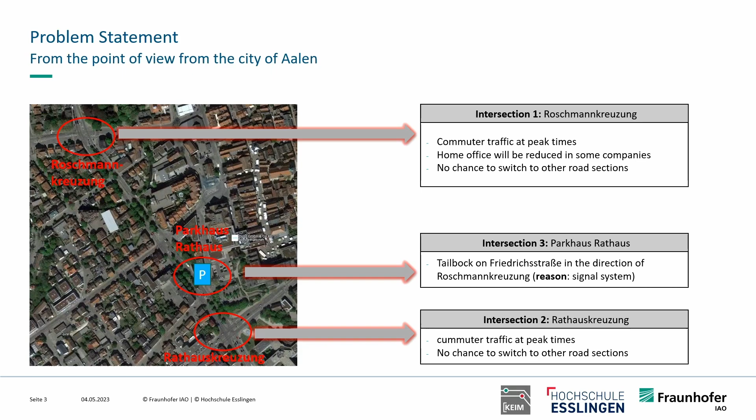This is a zoom to the intersection, the one in the north side, the Roschmannkreuzung. This is the Rathauskreuzung, and these two are connected by intersection 3. The problem is these are the major traffic axes, meaning there is a high amount of traffic there.

What's special about these intersections is that there's a bicycle lane, many pedestrians walking, and multiple lanes with trucks, cars, motorcycles, and buses. The goal here is to optimize the traffic flow by optimizing the traffic light system.

We thought about optimizing it maybe with other technologies, like a digital sign that says the traffic light is red, so turn down your speed or decrease the speed. But it wasn't that easy to do this, because there are many problems, so we decided to try to optimize the traffic light system instead.

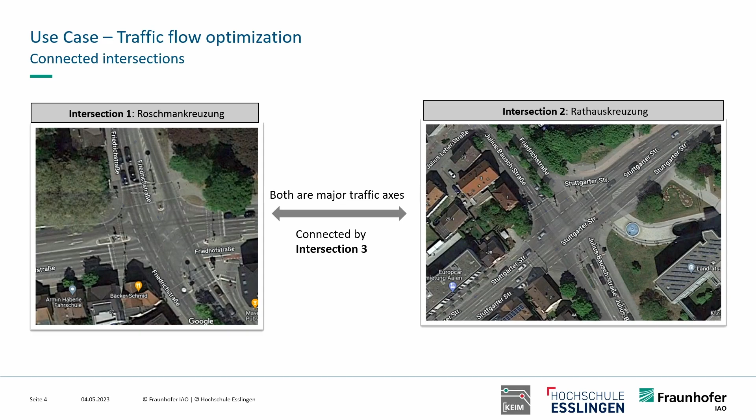Our solution approach, which we call a rule-based framework - we always need a fancy name - the idea behind this is that we want to collect a lot of data, not only traffic data from induction loops that detect a car in front of the traffic light, but also event data, like whether there's a football game, weather data, and so on. We are researchers and we always want more data.

Also parking data, meaning how many slots are free or empty in the parking houses. And part of the project is that we want to install more sensors to get more data.

These sensors are kind of special - about 10 camera systems. These cameras are connected to each other, meaning they can create an origin-destination matrix, and then we can hopefully see if a car turns left here, we can see this car on this lane turns left to this lane. That's the idea - if it works, we will see.

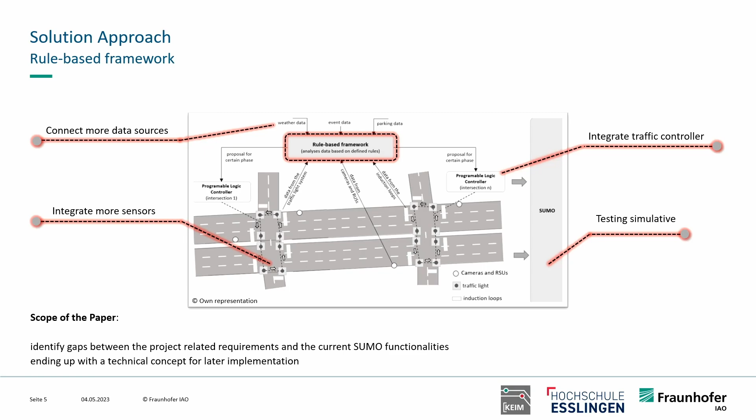So our idea is that we try to get the real world and model it in SUMO so that we have a one-to-one copy in SUMO. That's our goal. And for the paper, the scope is that we just want to see what are the requirements of the project which we need to transfer or which has to be covered by SUMO.

And first of all, to see, this is one crossing. It's a very simple picture of it. I made it with PowerPoint, it looks very fancy, I know. What you can see here is we have video detections and induction loops, and what I want to show you with this picture is that we have many sensors already on the crossing. It's not that easy to see all what is here.

I will read shortly: induction loop. We forgot to translate it to English, sorry. We have video detection, Trafi Cam, ZD - this one here is unknown. Then we also have sensors we don't know what this is. We received a paper from the city of Aalen with this information, so we're also not sure what this is, but there is something.

And the idea is that we want to integrate more data sources like the cameras - I told before, they are connected and exchange data via MQTT. And also we want to install roadside units there, for example for vehicle-to-X. And also consider data sources like Aalen events, weather data, and so on. So this means that these sensors will increase.

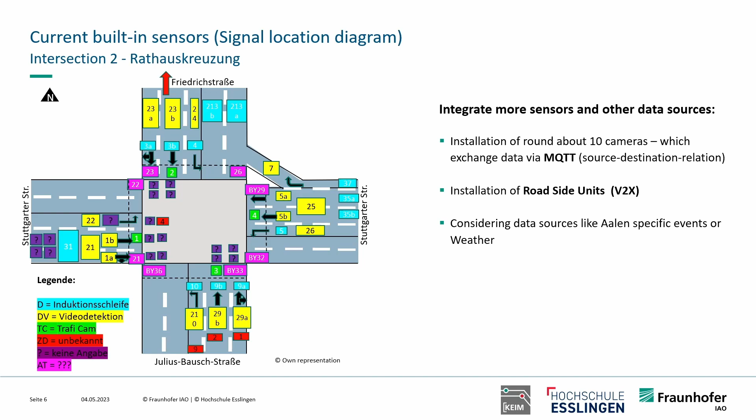Then I told you that we want to optimize the traffic light signals. This means that we have here a phase sequence plan. We have the different phases here, and here we have the transitions. This means I can go from phase 1 to, or transit to, phase 2 and so on. And we have received this picture here.

And now we have to think about how to integrate it into SUMO. Also we have to integrate the traffic controller from Yunex, where we don't have any information yet. But the traffic controller means that we have to communicate with our solution with the traffic controller, and then it goes to the traffic light. So the traffic controller can block our request or response.

And what we don't see here is that we have maybe special events on the street. This means we have emergency cases, maybe an ambulance there. Okay, we have this phase turn all to red so that the ambulance can drive through, but we don't know how this will happen currently.

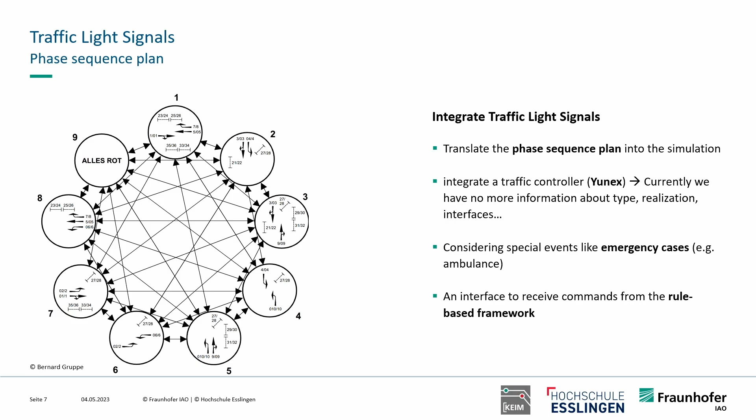As Ingo mentioned, it's just a technical concept. We have no implementation right now. But I like SUMO very much and I want to make it with SUMO. And so we were curious if SUMO provides all the features we need for this project.

And we found 4 different fields of requirements for this project: the traffic light systems requirements, the 5G sensor systems requirements, traffic simulation requirements, and traffic flow optimization requirements.

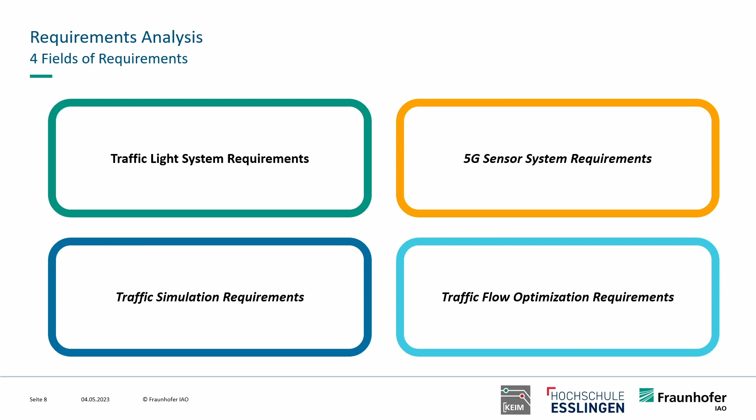For the traffic light system requirements, we need customizable TLS programs, and then the TLS can be actuated or sensed by detectors. TLS phases can be switched with an API, and we have interchangeable traffic light system programs. And we need this programmable PLC, as Ingo mentioned, this Yunex controller.

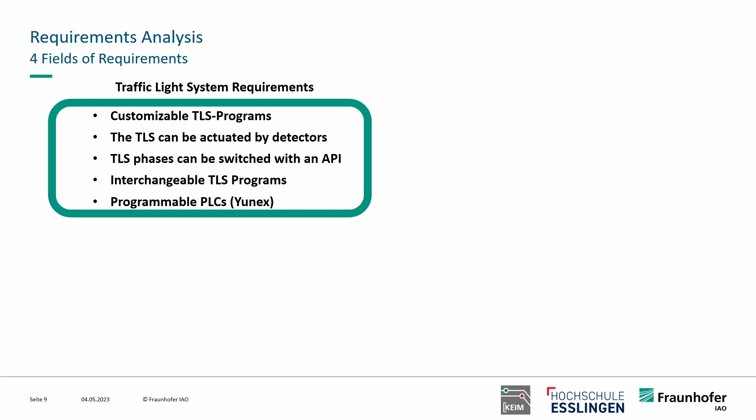And so SUMO provides all of them except this very special programmable Yunex controller, where we need a kind of block logic, something like SPS or something, which we need to implement there. Make this a green check mark. All right. Is it possible already? Ah, really? Okay, then let's discuss this.

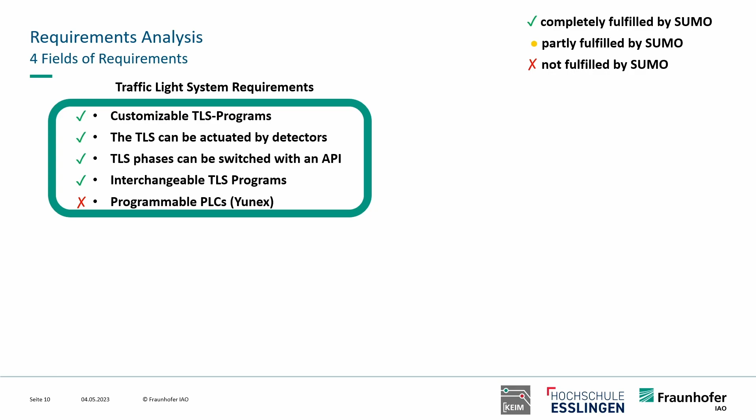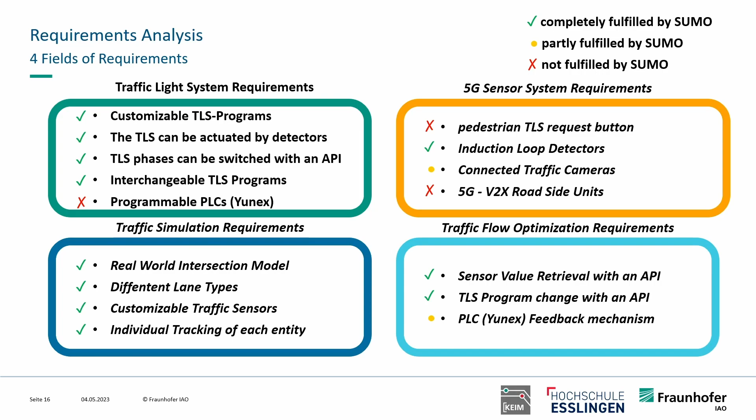And so here the first two points are covered with SUMO. And the last one is partly, what I would say, but maybe I'm also wrong here. Maybe we can go into the discussion then. So these were the main requirements which we figured out for our project. I will pass to Ingo.

So after we collected all the requirements, we made a gap analysis, and it ends up with a technical concept. I'll try to explain. We have three parts: reality, modeling, virtuality. Reality means we have the scenario, the city of Aalen, we have here intersections, lanes, and so on, induction loop, camera system, traffic lights, and so on. And this is the input for the modeling part, where you can see this dotted line here means it's SUMO-related content.

We need to translate the real world items or entities for SUMO. So we have here, for instance, applications like OSM Web Wizard, where we can convert the maps for SUMO, and also we have here different kinds of sensors, these multi-entry exit detectors for the connected camera systems, for instance, and we have, of course, traffic lights here. That's the modeling part, and then if this is done, we create many XML files here, and that's the input for the simulation, for the virtuality.

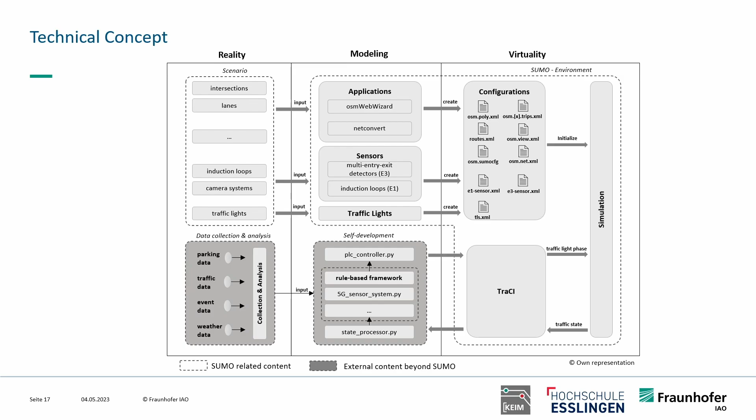But currently it's just a concept. The next step is that we try to implement this concept. That means we need to develop the Python parts. Also, we need to collect the data. And also we need some experience by trying out different sensor types in SUMO. And one important point is that we will soon receive traffic-related data. Currently, we don't have much traffic-related data.

And especially we are waiting for the Yunex interface, which data format we will receive, which clock rate, which information is inside the data. And so we would be happy if you have any experience with emulating TLS, PLCs, the traffic light system programs, and the programmable logic controllers, or you have any tips, you are welcome.